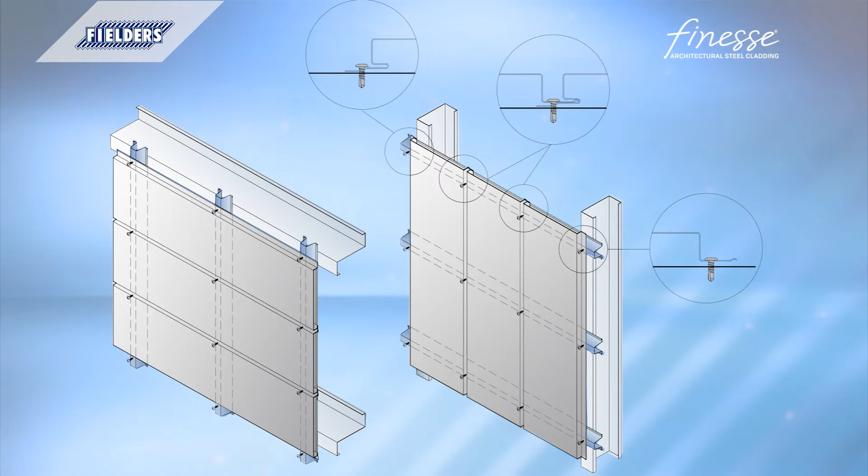Fielders Boulevard can be readily installed on either battens or a structural ply membrane. The panels are simply screw fixed in the recess joints with 10-gauge wafer head screws into either steel or timber battens or structural ply backing.

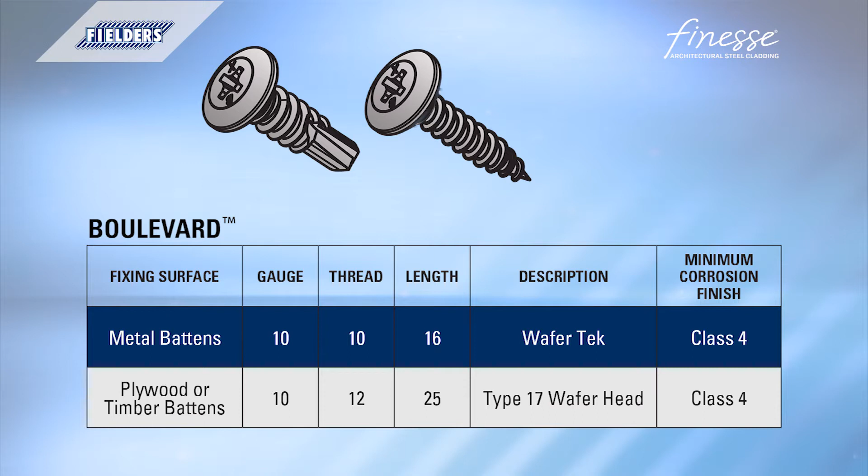To assist minimising the effects of oil canning in Fielders Boulevard cladding, it's recommended to keep panel lengths under 8 metres. However, for special project requirements, longer lengths may be available subject to negotiation and minimum order quantities.

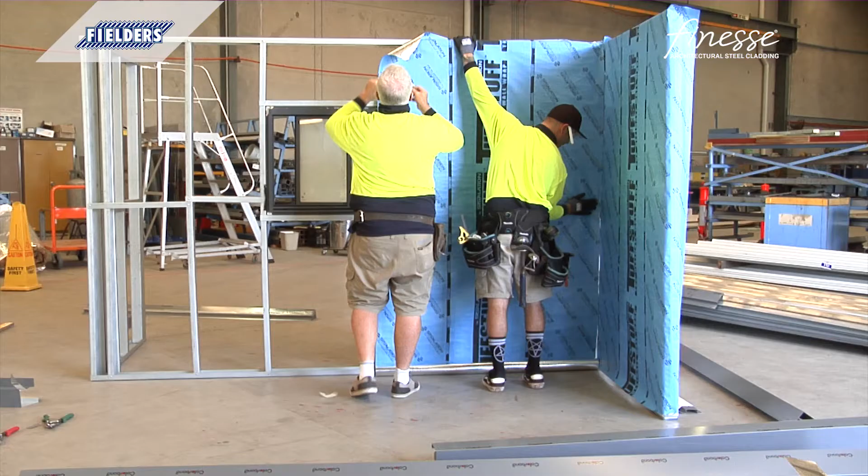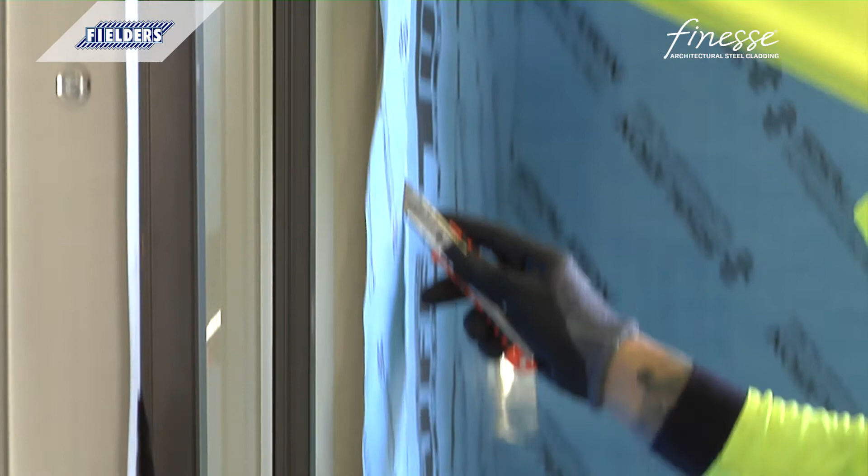Fielders Boulevard is designed to be installed in conjunction with a heavy-duty roof sarking as an additional weatherproofing measure for all walling applications. Follow the manufacturer's installation recommendations. Ensure there are no ripples or puckers. Make all the laps in the sarking with a 150mm lap. Tape with Sisalation tape on at least the outside face.

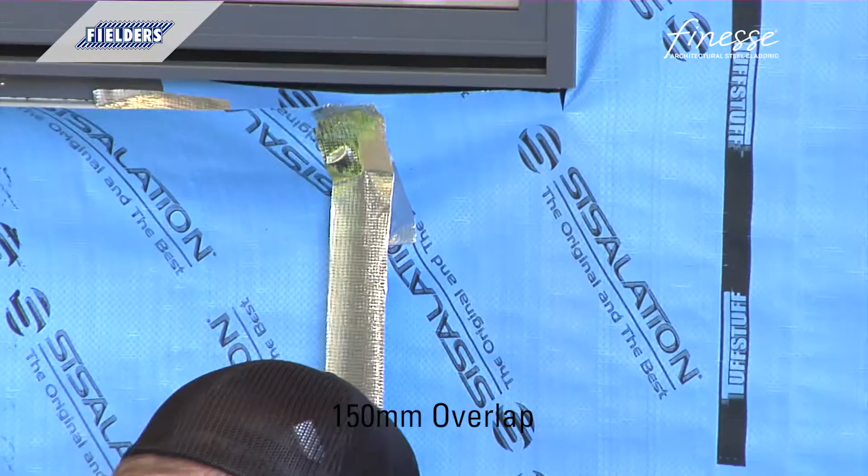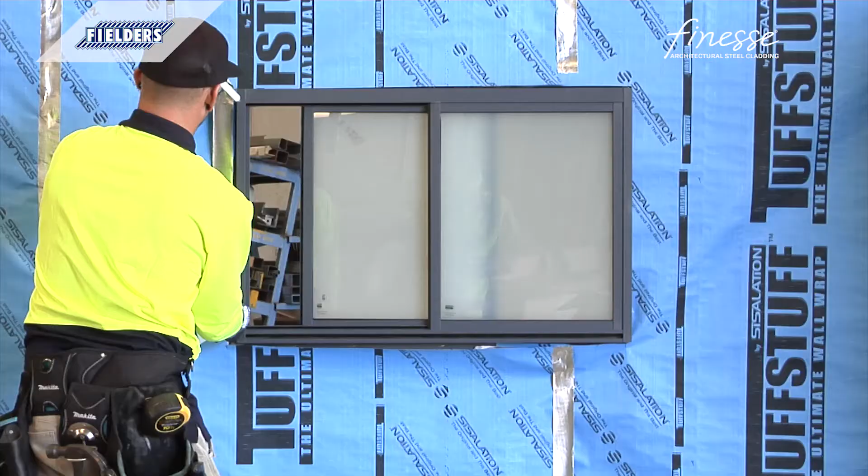Where Fielders Boulevard is being fixed to metal battens, install the heavy-duty sarking behind the battens rather than over the battens. Seal the entire perimeter of the membrane with premium quality Sisalation tape.

Fielders Boulevard's variable cover widths allow walls to be set out so that the wall panels start and finish with full panels. These are panels with closed ends, maximising the clean lines and visual aesthetic of the finished product. Align the Boulevard express joints with window and door openings wherever possible.

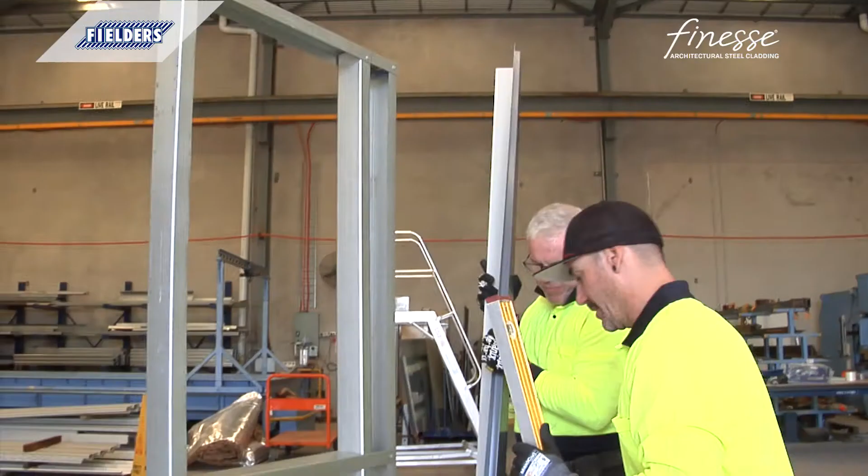Note the double battens at the corners of the frame to allow fixing of the cladding and flashings. Spacing of these battens is dependent on the width of the flashings and the preferred size of the express joint. There are a wide variety of corner options for Boulevard depending on both the direction of installation, vertical or horizontal, and the desired aesthetic. A number of options are presented in the online Finesse design and installation manual.

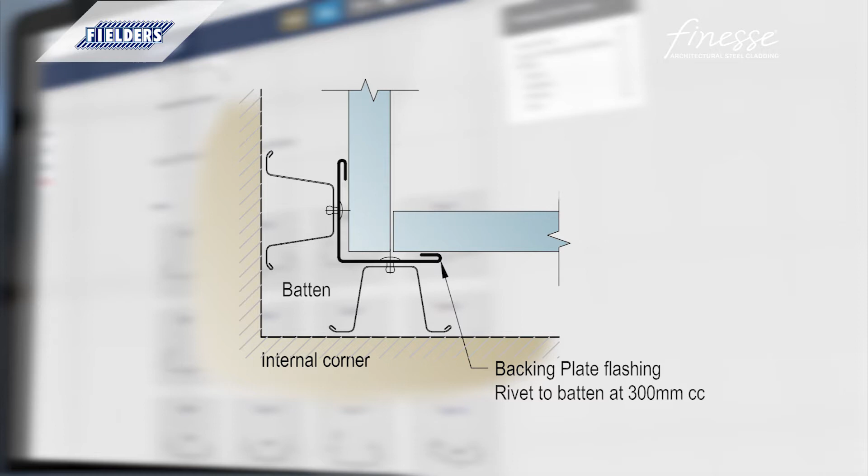For horizontal applications, some examples include a folded internal corner flashing without a vertical express joint, a folded external corner flashing with a matched vertical express joint, and a formed and folded external corner using Boulevard panels with vertical express joints. Many permutations of these flashings are possible for both horizontal and vertical installations, and these flashing details will impact on panel lengths and widths.

At the bottom of the facade, a flashing is required to direct any water from the membrane external of the facade. This will be done in a way as to allow any water to pass between the flashing and the foot mould. There are many ways to accomplish this. In this two-piece flashing example, the back section needs to be installed behind sarking and battens and, as such, forms a set-out point for installation.

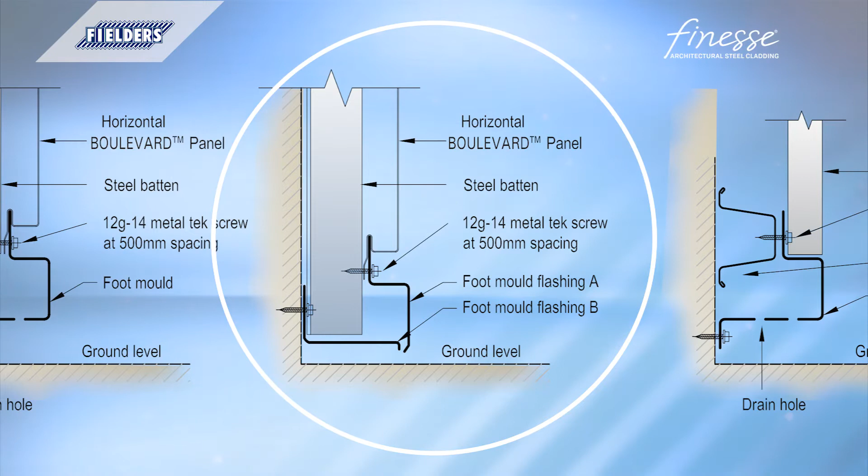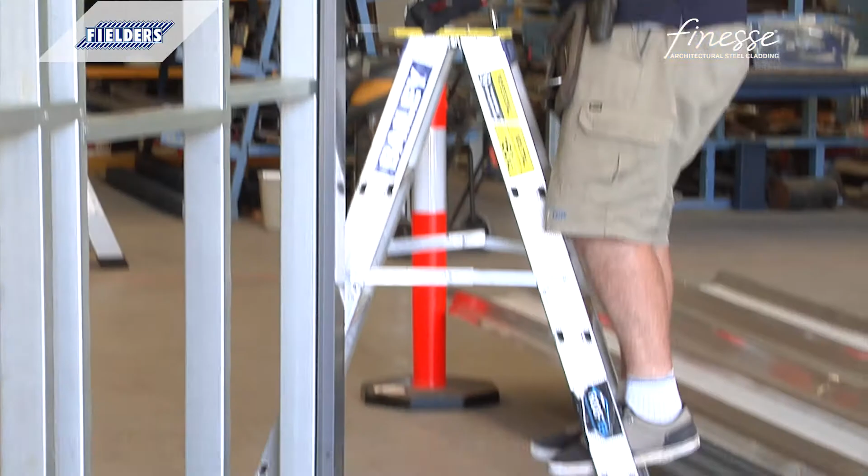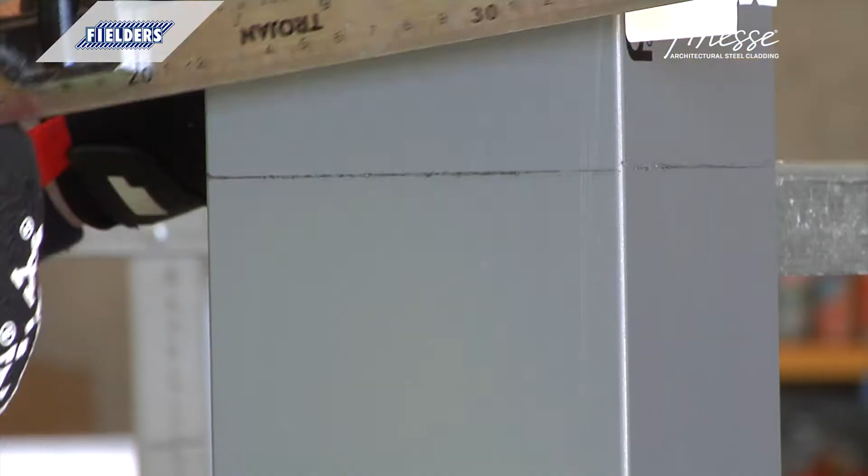Corner flashings are cut and temporarily fixed into position ahead of installation of the cladding panels. Measure corner panels in place. Mark and cut to create a tab at the top of the corner and fold over.

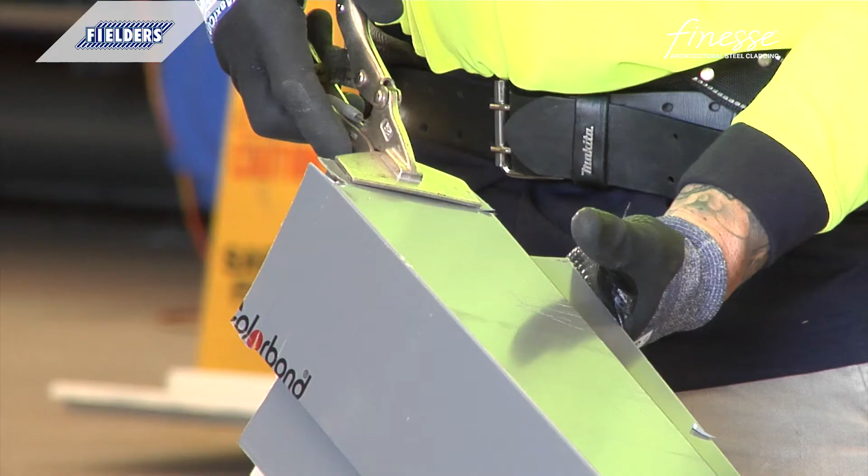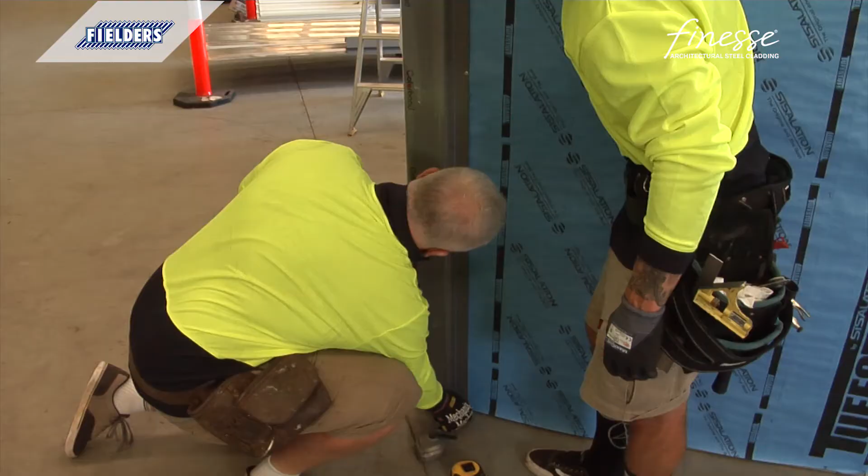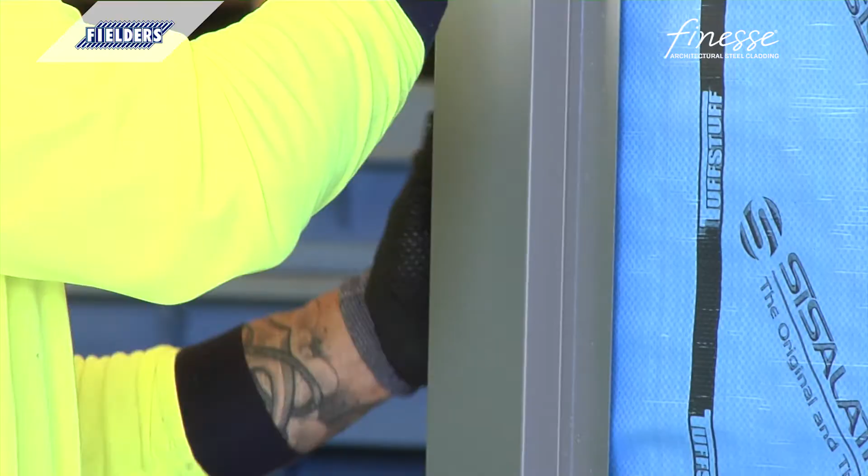The panel install will go smoothly if the corner and edge cladding is perfectly plumb, parallel top to bottom. This will allow the even channel aesthetic to be realised. Chalk mark the vertical underlaps where the closed end of the Boulevard panel will sit and spot check your measurements as you fix the corners in place. To achieve the final aesthetic effect, it's important to be millimetre accurate.

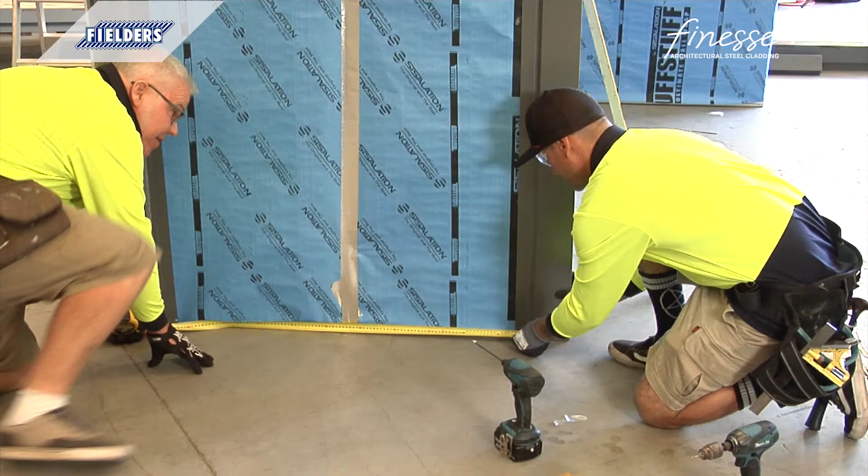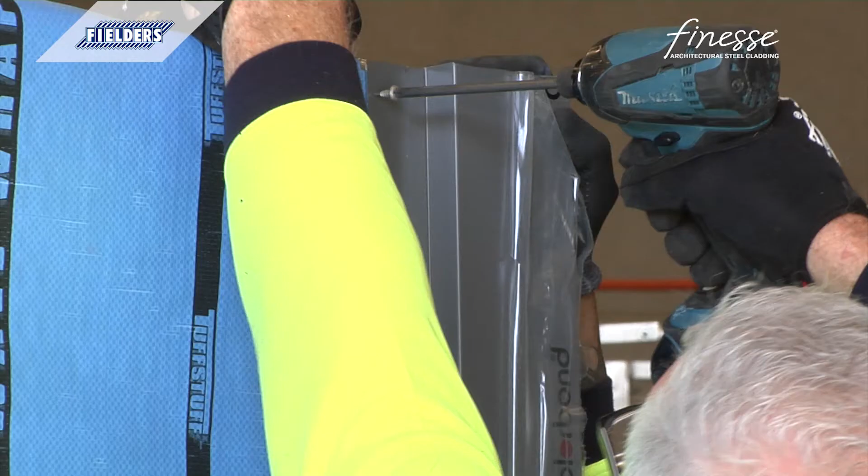Careful attention must be paid to ensure both waterproofing of the lateral connections to parapet and toe moulds, as well as ensuring proper drainage to avoid moisture being trapped between surfaces of flashings. If you have access, rivet fix through the top folded tab before fixing any parapet style flashing.

As with all flashings for Boulevard, there are many options for parapet flashings. Cut the parapet flashing to length and mitre over the corner flashings to form a neat, watertight finish.

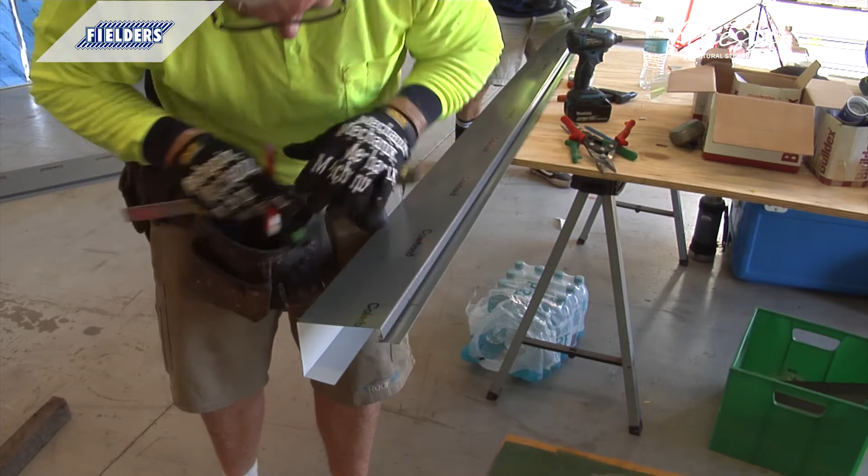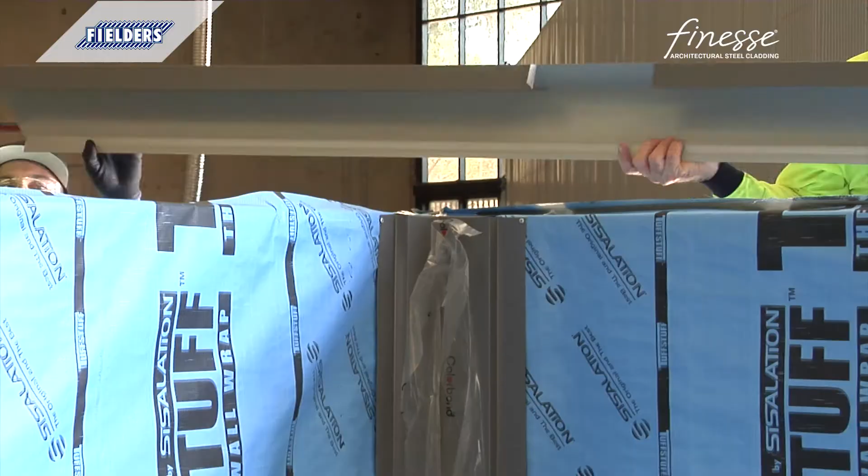Apply silicone sealant to the corner flashing along the edges where the parapet capping will be fixed. Screw or rivet fix across the joint.

For maximum weather tightness in Boulevard vertical installations, start laying sheets from the end of the building that'll be in the leeward side of the worst anticipated or prevailing weather. Also, it's much easier and safer to turn sheets on the ground than on scaffolding, etc. Before lifting sheets onto scaffolding, check that they're the correct way around and the underlapping tongue side is towards the edge of the wall from which the installation will start.

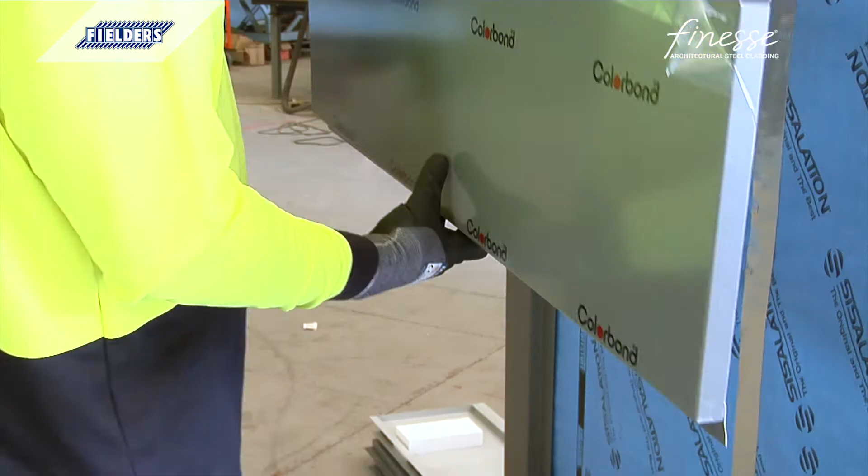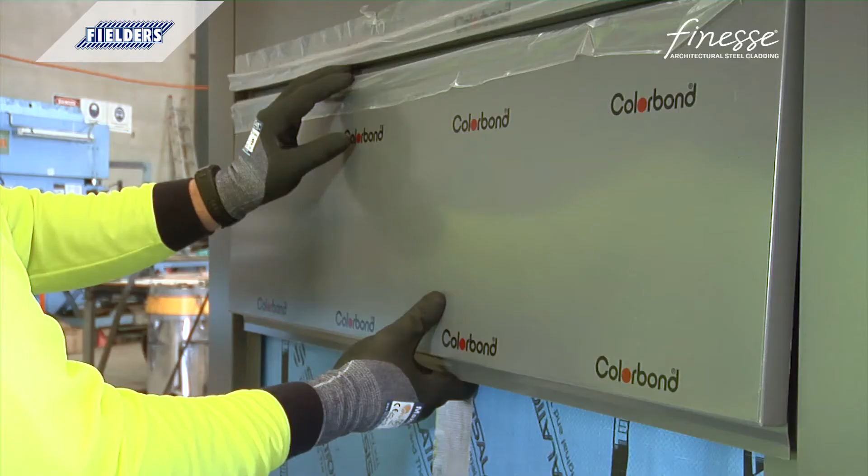For horizontal installation, as shown in this video, Boulevard panel installation starts at the top of the wall facade and works down the wall with the underlap tongue facing up and the receiving groove pointing down. This allows for proper drainage of the express joins. Panels that are exposed to vertical express joins must have closed ends and should be ordered as such. For panels with the ends covered by overflashing, closed ends may not be required.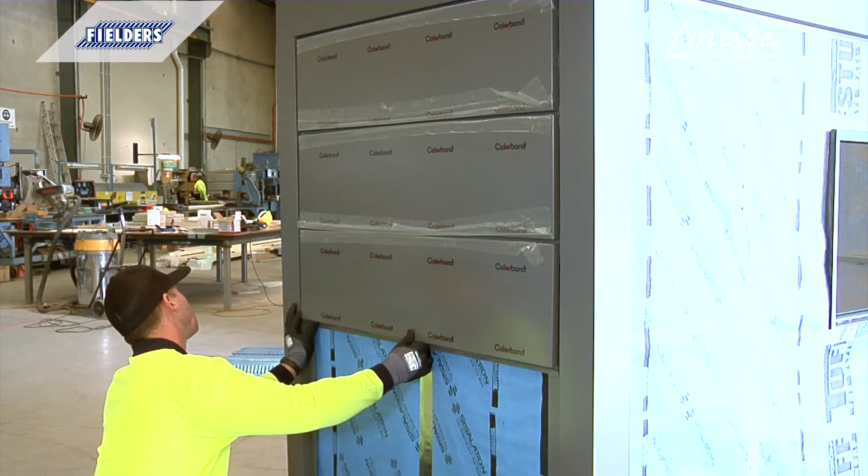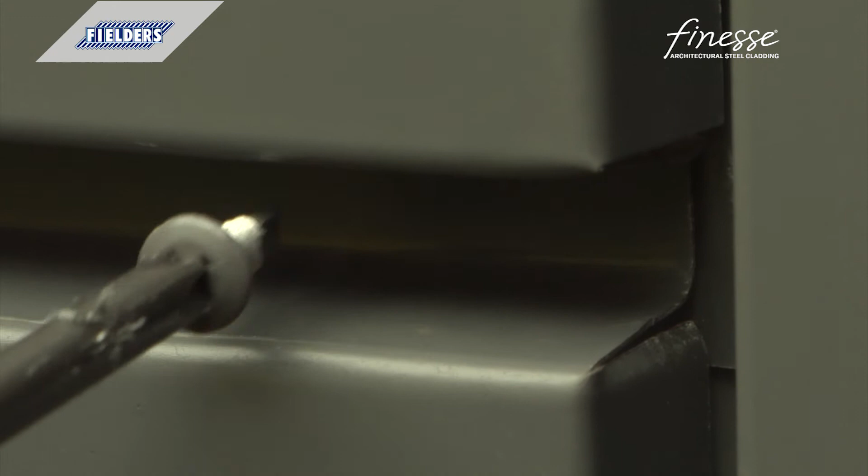Remove any protective strippable film from the panel edges before fixing. Ensure parallel express joins to both horizontal and vertical planes. And ensure that both edge groove measurements are consistent panel to panel. Fix the wafer head screws in the express joints at each batten.

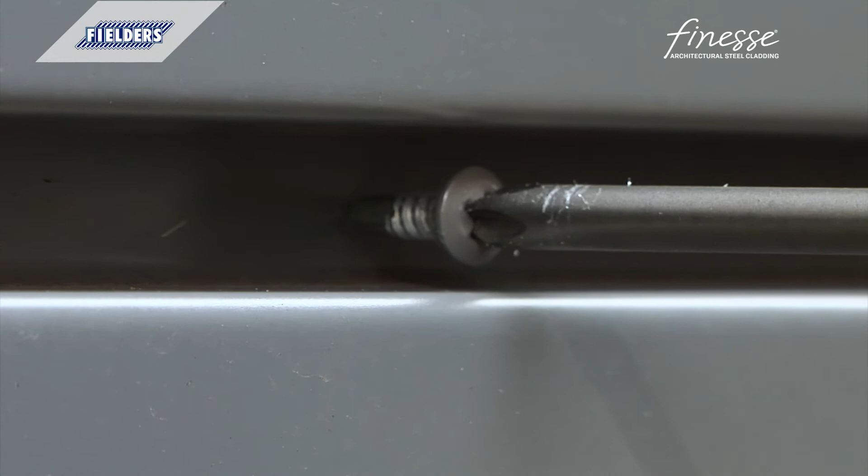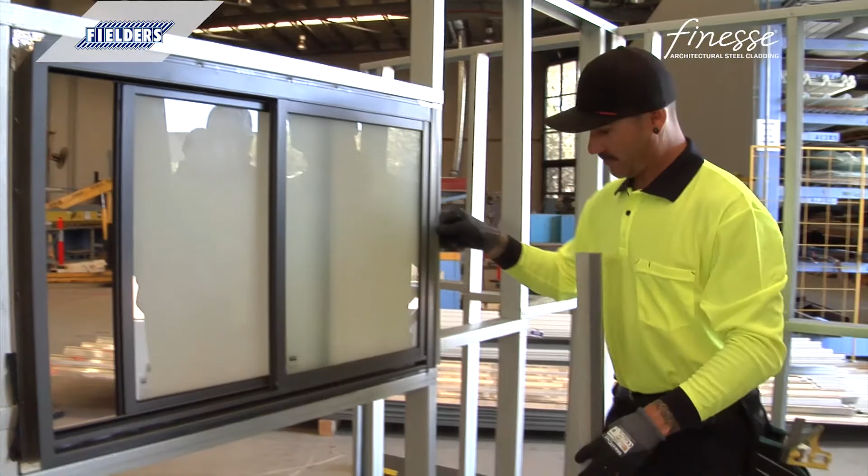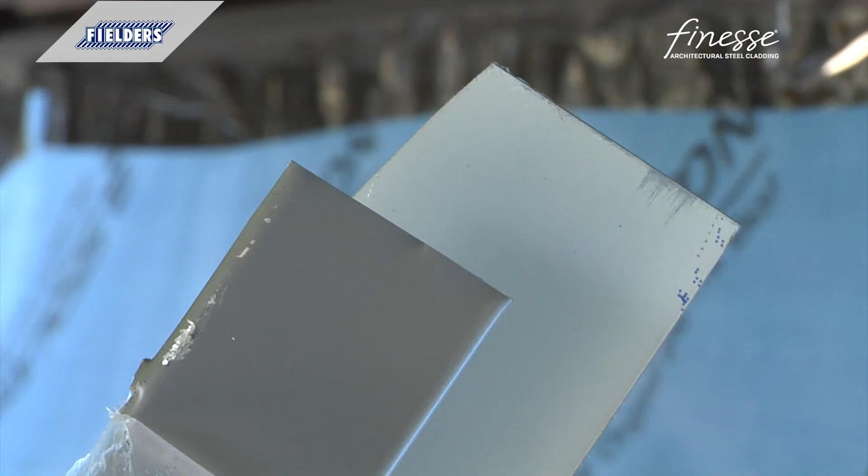Careful consideration needs to be given to flashing details around window and door openings to ensure both water tightness and visual impact. Once again, there are many ways to achieve both aims. Here, to create the head flashing, a simple U shape has the front face mitered into the width of the side flashing. The rear face is left to sit against the wall. The side flashing front face is cut to sit behind the head.

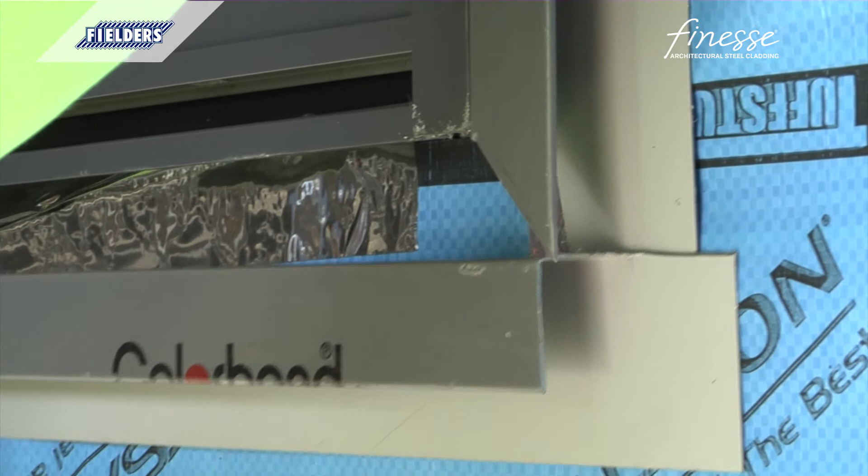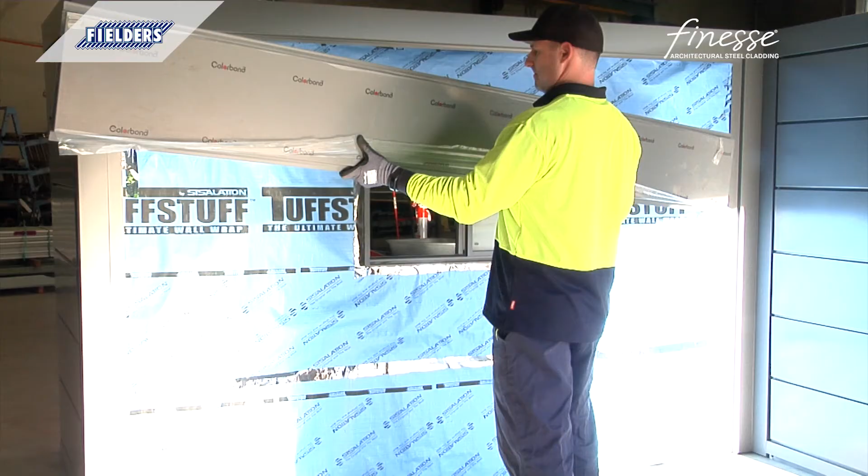And the bottom edge is mitered as per the head flashing and will sit over the sill flashing. The rear face will go behind the rear face of the head and sill flashing. The sill flashing is cut to sit behind the mitre of the side flashing. In this instance, to allow the top Boulevard panel to slide up into the parapet capping recess and fit snugly into the flashing channel, the panel and head flashing are fitted together as one unit.

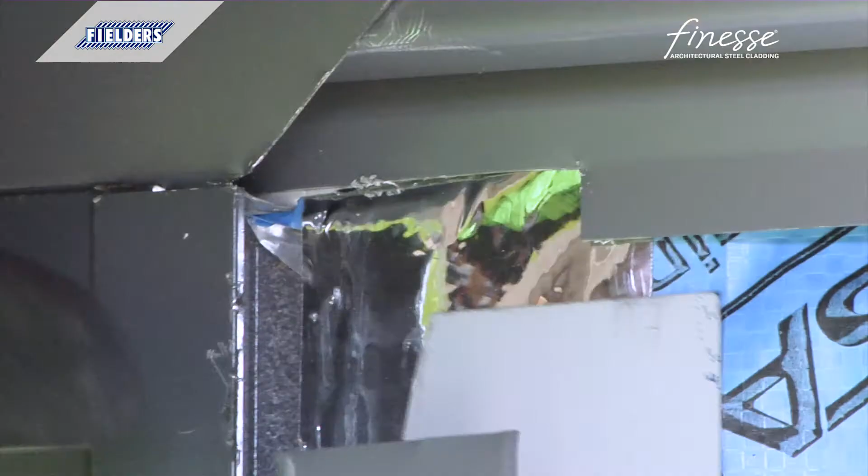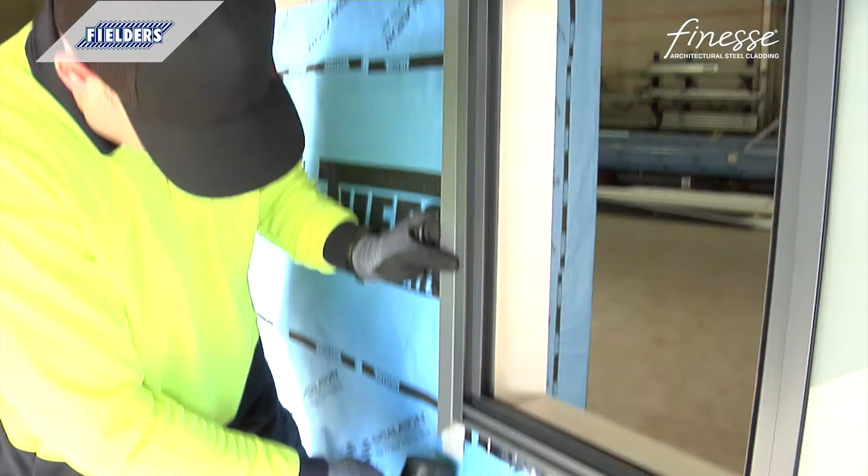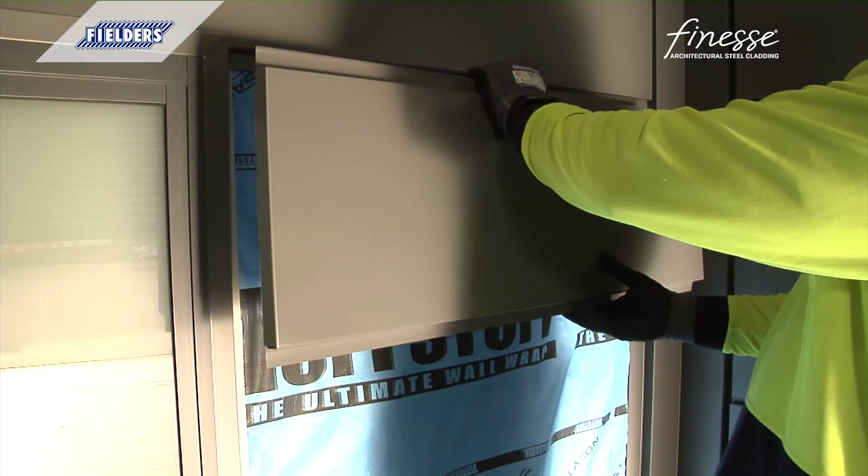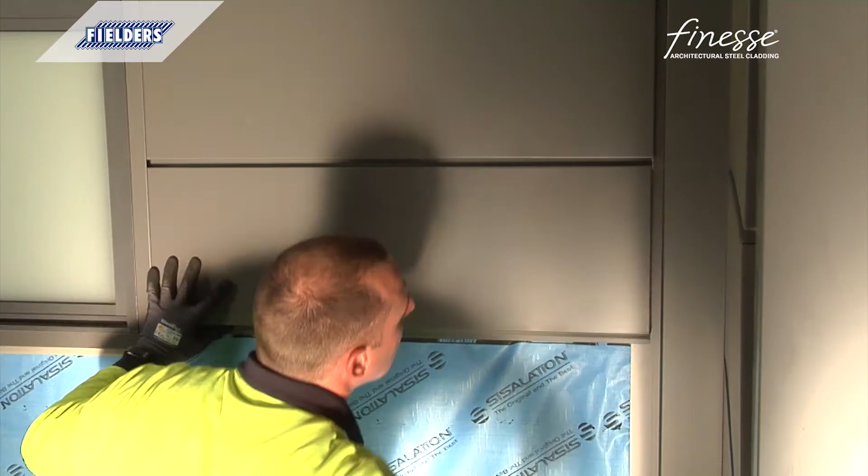The side flashings are fitted in place with gentle assistance from a rubber mallet as required. And then fixed to the wall frame. Install the sill flashing. Install Boulevard panels beside windows, ensuring that parallel lines are maintained on each side of the opening. Continue installing panels below the opening.

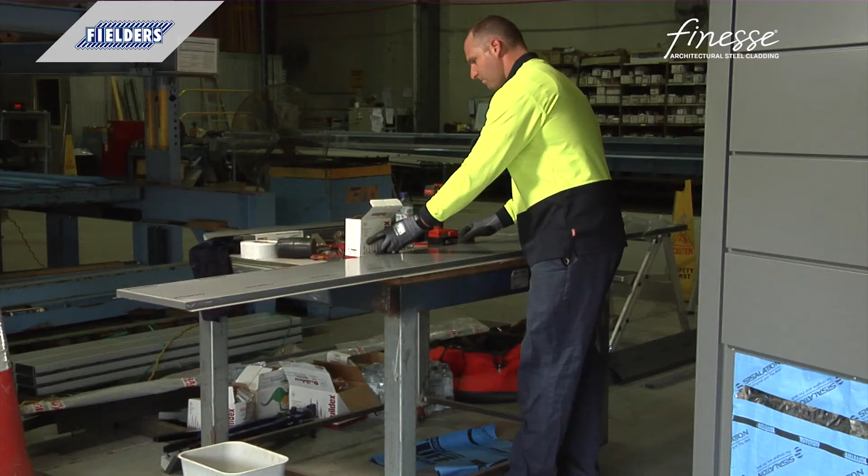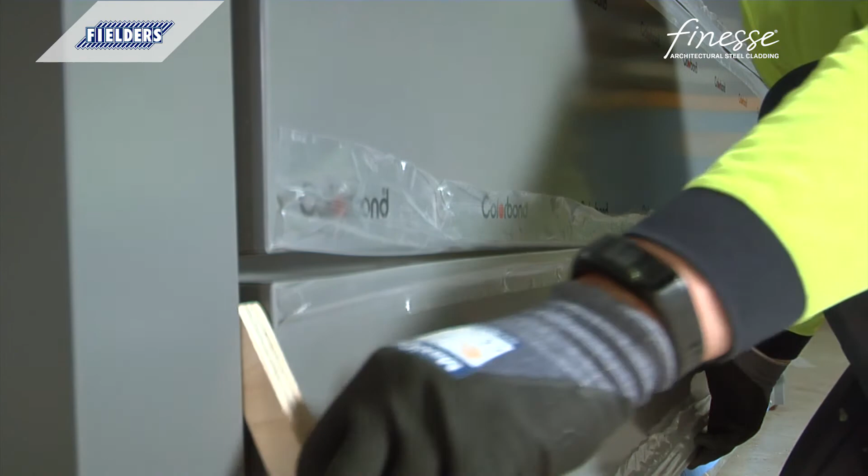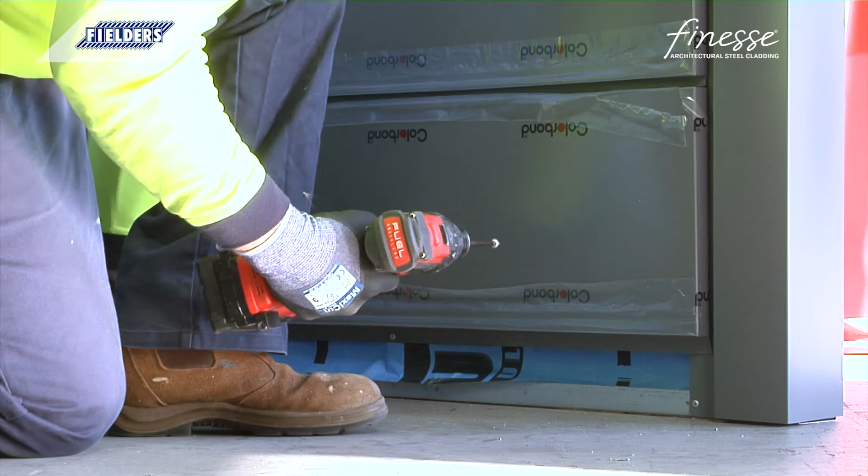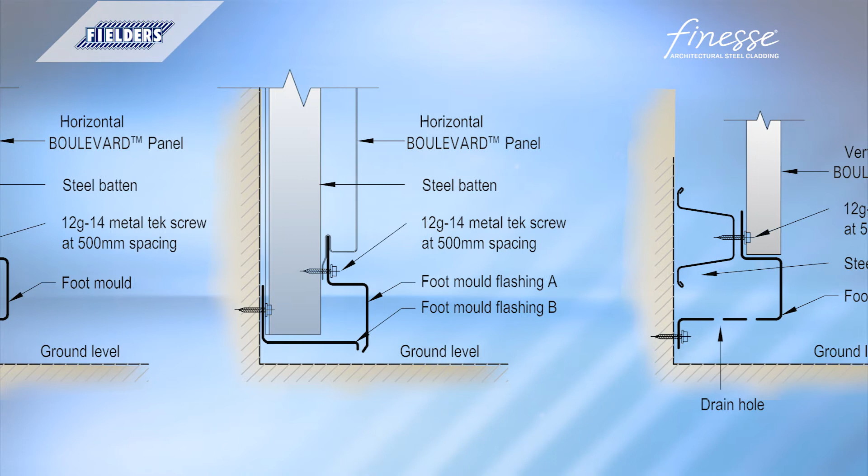The last sheet is installed as per other sheets, with the final sections of the toe mould likewise installed and fitted to corner moulds to ensure water tightness and drainage. There are many options for toe moulds, with the Fielders Finesse design and install manual depicting but a few. The important considerations are that the system is secure against wind loads, robust to take occasional impacts from pedestrian traffic, etc., provides drainage for moisture from the face of the sarking membrane, and is visually appealing.

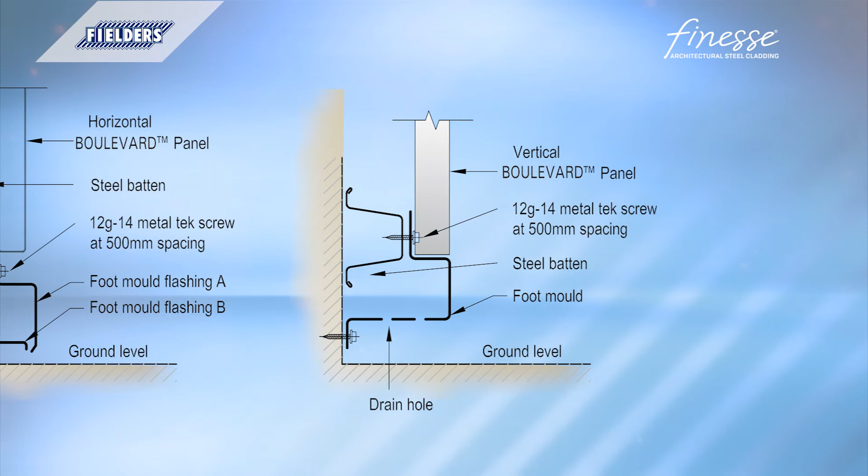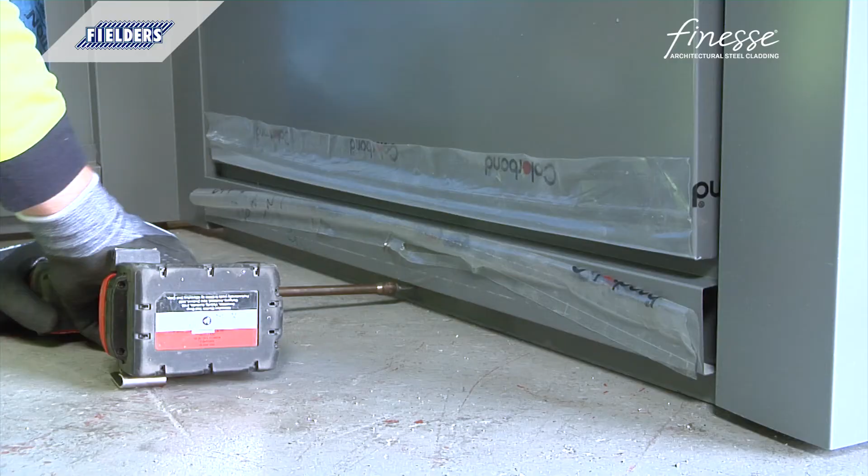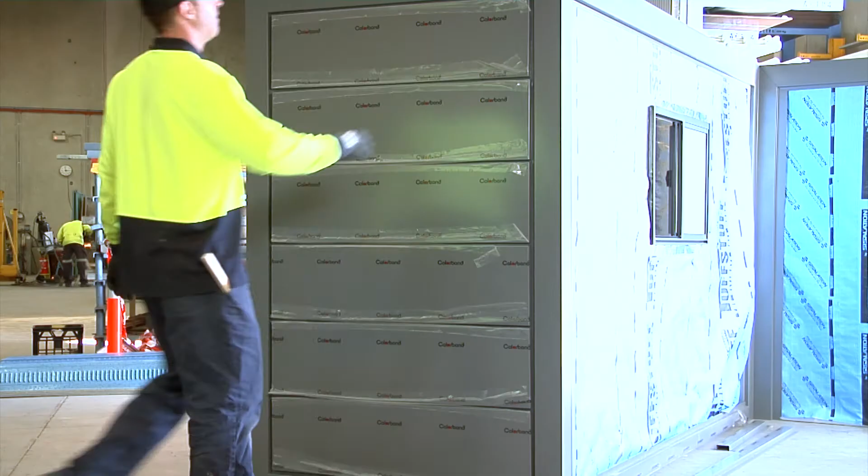In this design, our installers prepare the foot mould by drilling some drainage holes into the bottom edge. The flashing is pushed up into the express joint recess and screwed into the frame. Ensure all swarf is removed prior to fixing any flashing. To minimise the chance of damage to the coated surface, only completely remove the protective film from the panels when the wall install is complete.

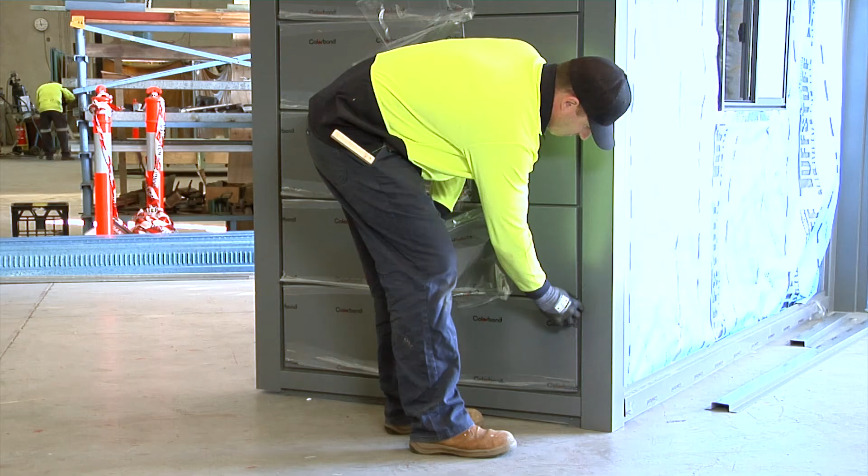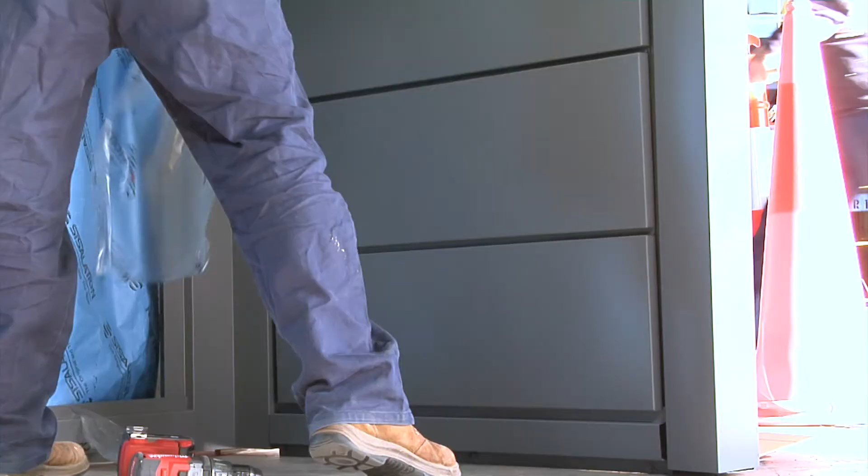Whilst convenient and structurally sound, the use of self-drilling wafer head screws unavoidably generates swarf. Swarf is the metal shavings generated when the screws drill through the Boulevard cladding and battens behind. If this swarf is allowed to collect and remain in the express joints, it'll rust, creating unsightly staining to the Boulevard cladding and potentially reducing its lifespan. It's therefore very important that all swarf is brushed or blown off the Boulevard panels during installation, with the final task to do an overall clean to ensure any missed swarf is removed.